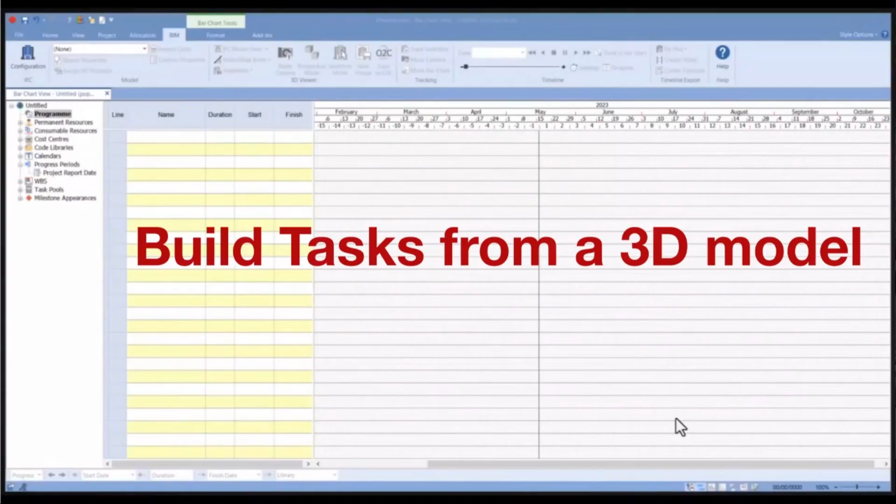What we're showing is, up until now, what people do is create a project schedule. They may or may not have a 3D model. What we've had for years is the ability to link that model to that schedule, in different ways, but it's a project independent model that you bring in and link to it. The concept here is different: rather than starting with a separate schedule and a separate model, let's take the model and create the schedule from it.

Now, this is not replacing the scheduler's job. This is just the first pass, the first run, using data and metadata that's in the model. As time goes on, that data is getting better. This example here is a very simple one, but I've seen customers where it not only creates the project, it creates all the durations, the logic links, everything, just from a model.

So there's massive potential here, and it's not replacing the schedule. It means that 80% of the time spent on a tender or bid, the scheduling time, is gone. Not the actual scheduling itself, but all the data entry—those 10,000 tasks they're typing in is automatically done for them because it's taking all that metadata.

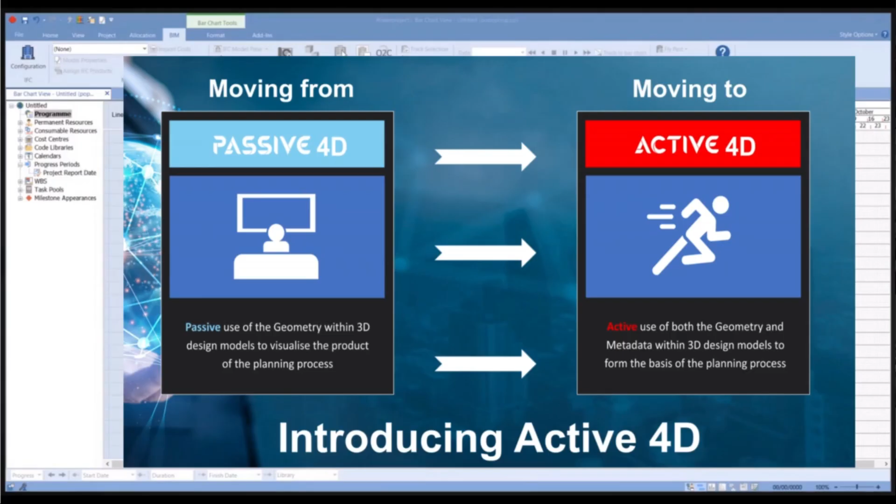So what this video is starting off with is we've got a blank Powerproject here. Ideally the demo should really show that coming down from Vision. And what they've done is linked it to a model, 2 models in fact.

I'm going to start it here, and hopefully you can see this. So they're going here, selecting, we're going to go into the configuration and select the models. I'll just pause it there to show you, we've got 2 models: an architectural model and a structural model, so that's all the slabs and columns in there. Then we've got the Riverside group model, which combines those two, so federates those models together. Unlimited amounts of models can be federated together in there.

So if I go through this, what we do is bring that in, it opens up inside Powerproject, and there is the model. Then we have this option at the top, which is an add-in we called Schedule from IFC.

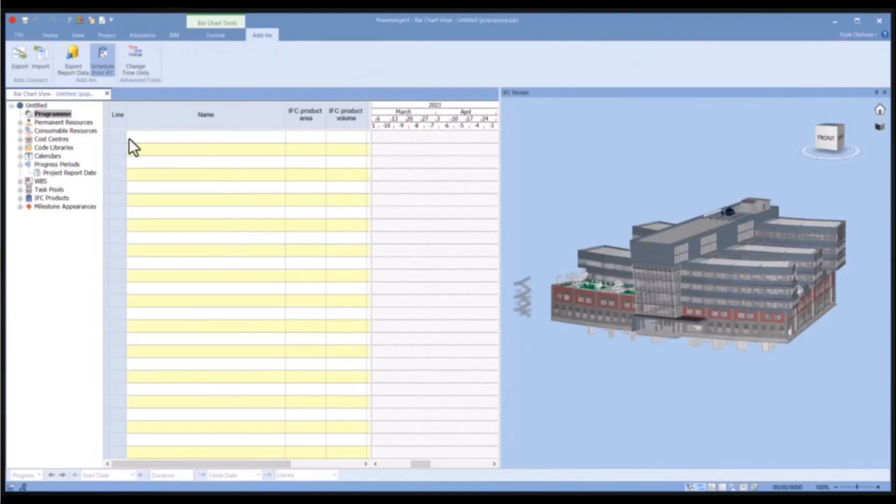We select that, and it allows us to read that model—these are all the properties you can see inside the model: ID, parent ID, domain, IFC type, and these are all common items across all those models they've got in there. So all we're simply doing is using the data inside the model, choosing those elements.

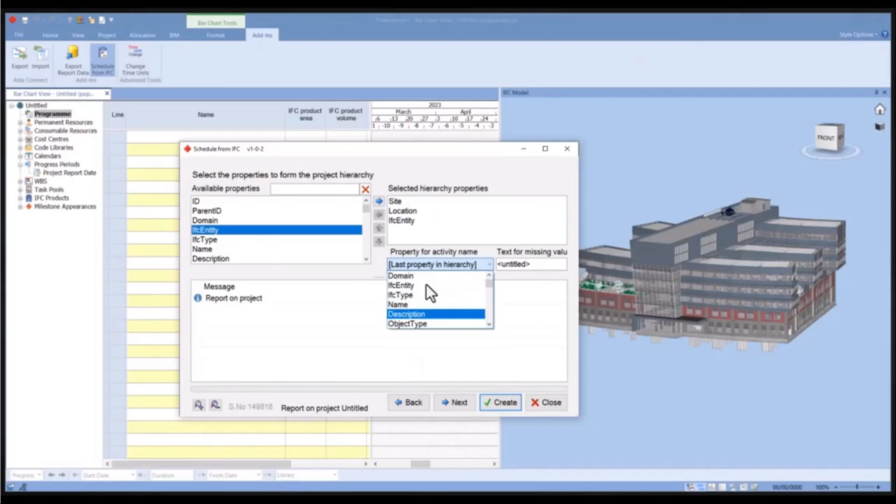We're going to go over, say for example here, to site, I think it is, we'll choose that. We'll say we're going to do site, and then everything after that will be location based, and then we're going to do it by entity. What we're going to do is the property of the activity name is going to come from the name of the item, like wall base and so forth.

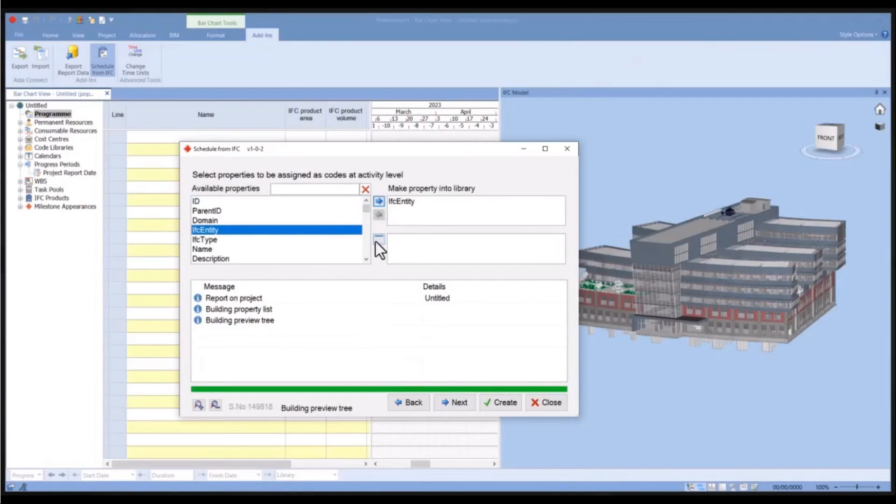This now creates a first pass of the schedule. We can go through here and say we do or don't want some of these items, rearrange them in case floor 3 is above floor 2 and so forth, or below it. Then we can actually take some of these properties and create code libraries inside Powerproject for those. Just clicking a few selections here, and once we've done that, you can see a few details, and then we're going to hit create.

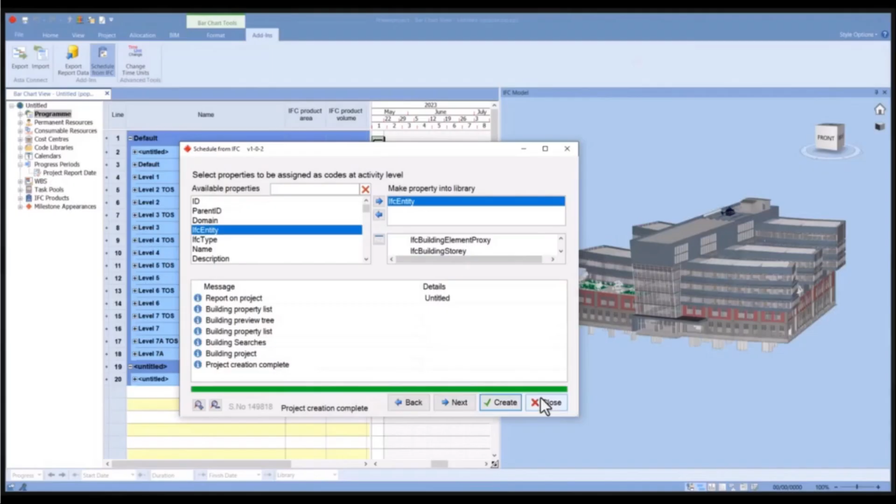Just to pause there again, if you see in the background, that's now created a fully built schedule. It's not linked, it's all the activities in the hierarchy, level based by site, location, which is the level, and then the entity name and the name of the actual object that you're linking to. So we've created that. What we're then going to do is close that down. That's done. We can now see here, we've actually created that IFC entities code library, and that's been pre-allocated to all the activities inside here.

So if we go into one of these and we look at that, I think we're going to go into—just removed some of the items we don't need—and there we go, there's all the different tasks.

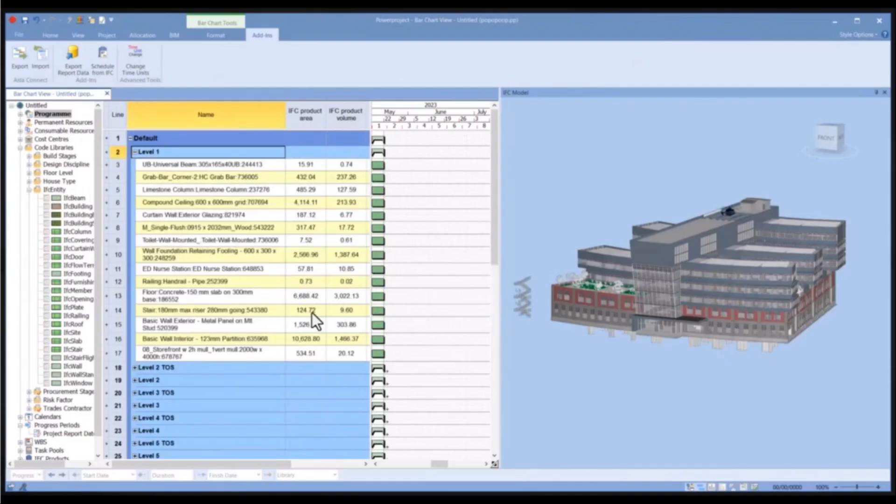That's the name of the objects and elements inside there, with the area and volume of those objects. What we're going to do is select all the activities in here, and simply put a finish-to-start link against all activities.

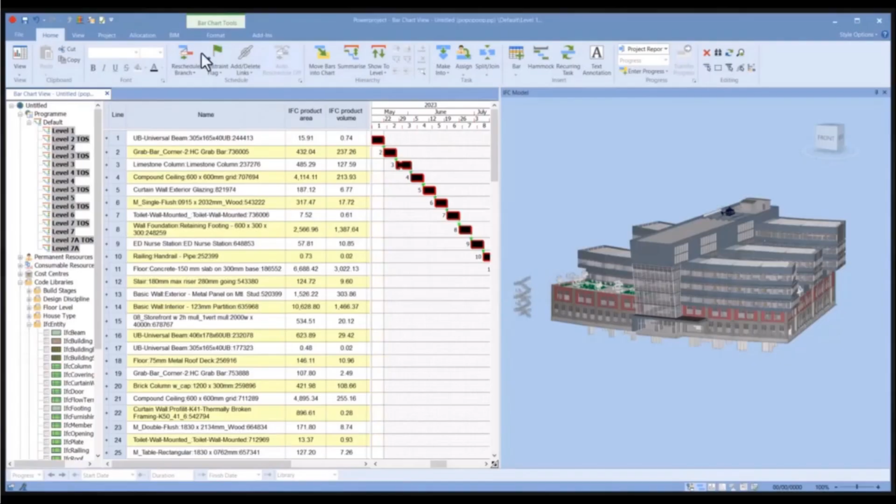So we go into this, select the first task, Control-select A to select everything. In Powerproject, just do the link tasks, reschedule that so it recalculates, and then go back to the top level of the project. You can see it's been created automatically, and we can show all levels to open it up and see the schedule in detail. Obviously its durations are just default durations, 5 days each at the moment, but it's gone through and added all these activities automatically.

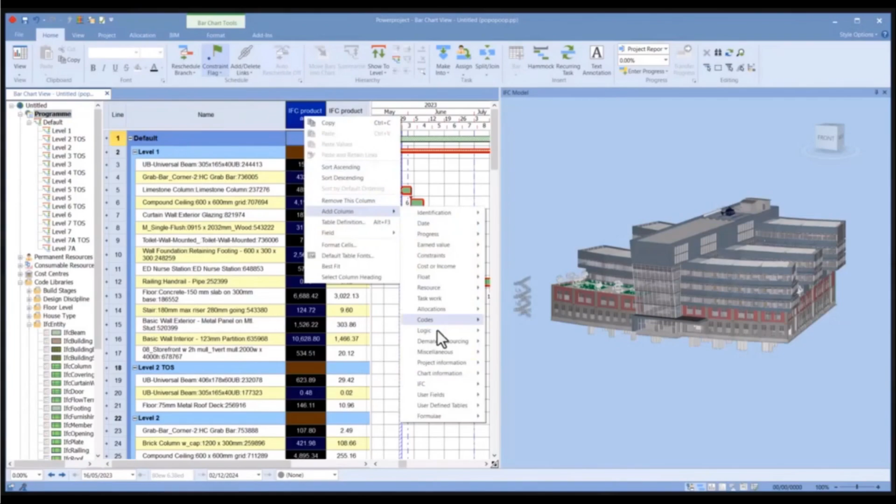We're just going to add a column in here, the code library, so the task entity, and you can see it shows the entity and the items - that's the slab, that's the stairs, the walls, and so forth.

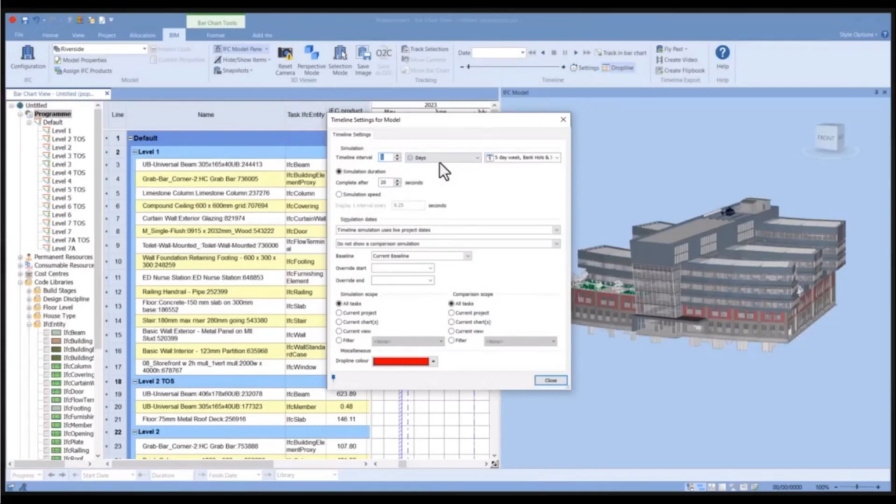Then we go in and set up the playback. We're not going to have 60 seconds - we make sure it's set to 20 seconds, play by day, close that, and then hit the play button.

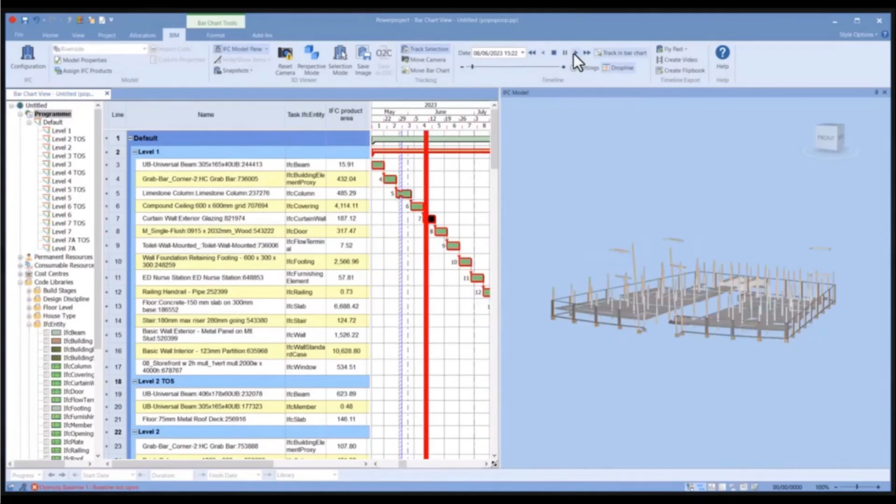As you can see, in a matter of literally minutes, we've taken a federated group model of architectural and structural and created a fully built schedule. We can now see that running through - it's just highlighting the items it's selecting as it goes. But obviously, the better data inside the model, the better this schedule will be. The key here is, we're one of the only systems out there that does this.

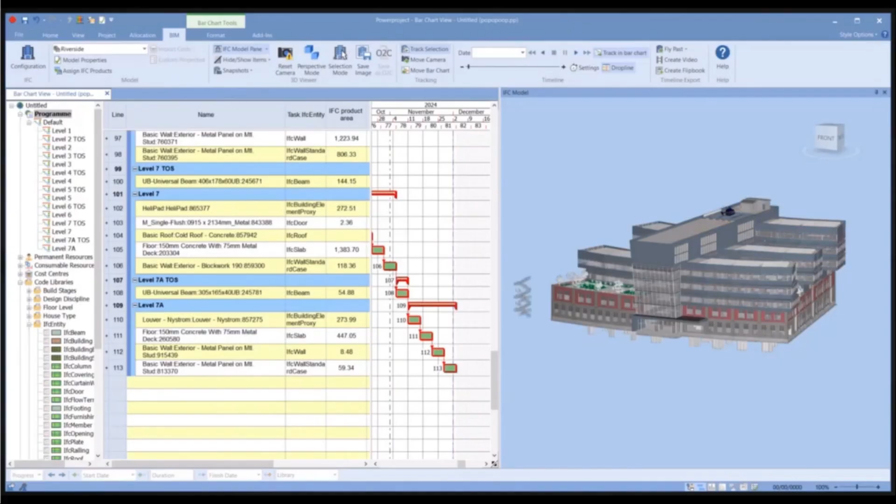And models are getting better and better, with more metadata and more data being stored inside them as it goes. Even if they're not requesting it, the people providing the models are actually putting more data into them.